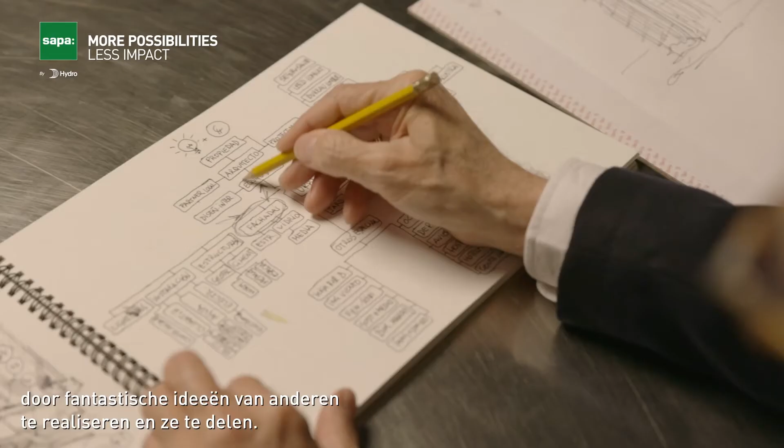First of all, I would like to introduce myself with a simple sentence. Yes, I'm an architect, but an architect with a special profile, because my team and I have developed more than 180 buildings over the last 30 years, making credible the ideas from others, sharing them by teaching in different universities, and especially drawing.

We have a small and very dynamic office based in Barcelona, from where we offer facade consultancy for the best architects around the world, including Pritzker Prize winners.

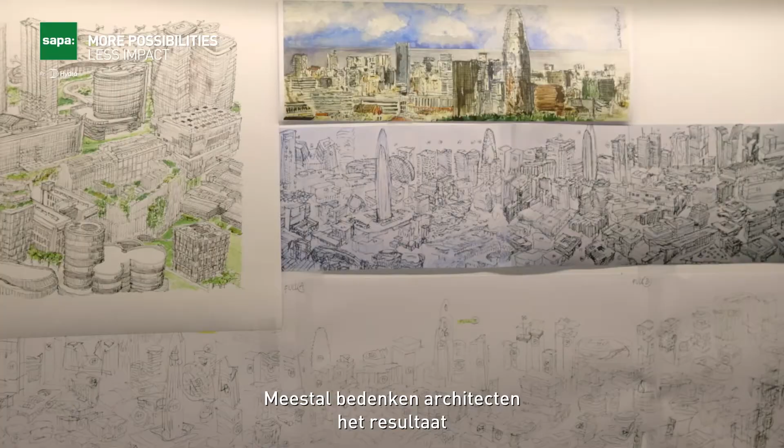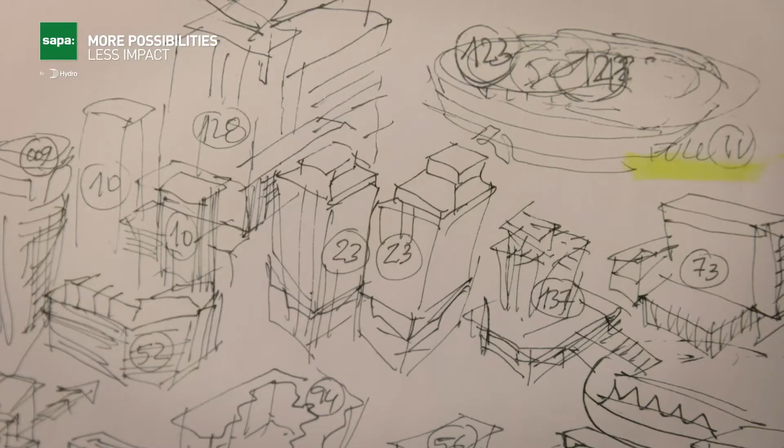Usually architects imagine the result and engineers create the process, or explaining it another way, architects think what and engineers know how. So we, as facade consultants, move in an equidistant position between both, and our projects are developed with a simple philosophy: technique and form are the same.

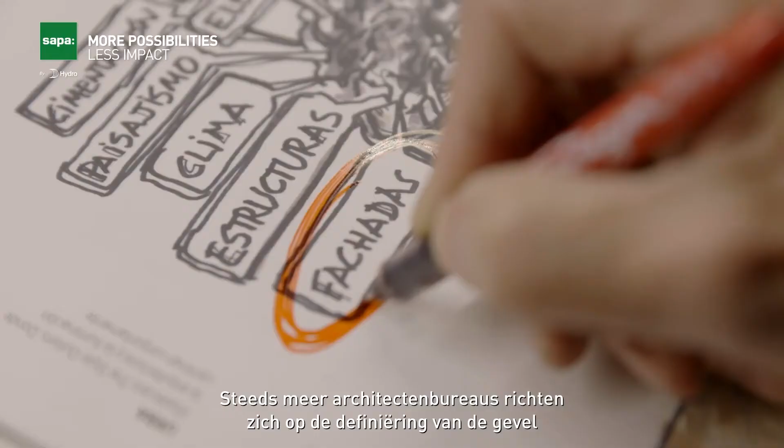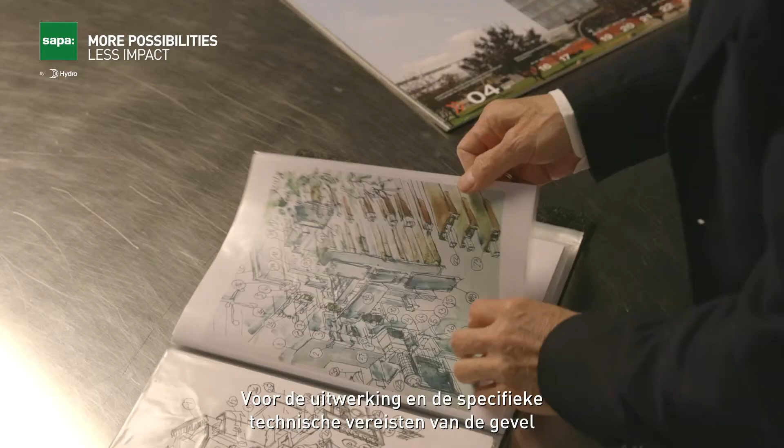Every day, more and more architecture studios focus their work on the level of definition of the facade, the aesthetic aspect, and the conceptual and functional development, leaving the detailing and the specific topics and elements of the facade to be delegated to the technical specialists from the industry.

So the most common way to face the problem of technology is to claim the support of brands that help us develop the most ambitious projects. Our role as consultant, in addition to the above, is to think and advise from the strategic development.

The present leads us to consider energy as one of the engines of evolution, and this has been the case for decades. However, this contrasts with the need to work with large formats and glazed surfaces that put the so-called window-wall ratio in increase, which affects the energy performance of the facade, in contradiction with the dimension of the transparent areas of the buildings.

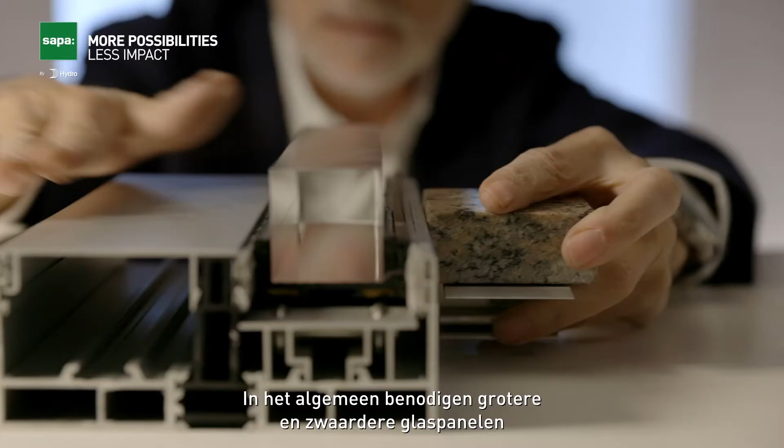On the other hand, this need to increase sizes requires larger profile dimensions, engineered for bigger and heavier glass panels, by means of innovative connection and reinforced glazing support.

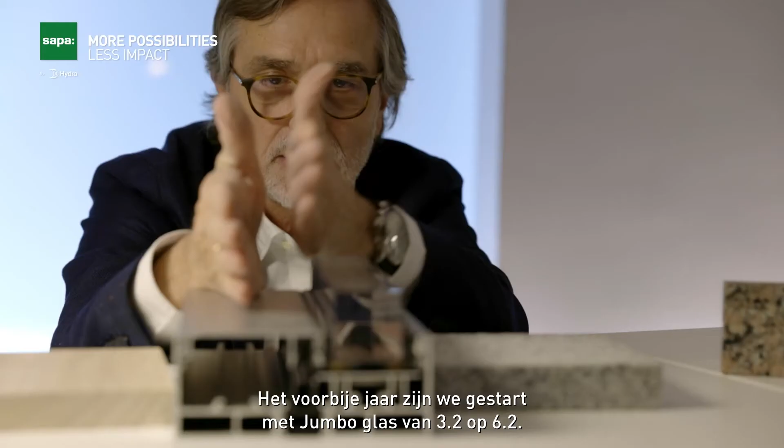Last year we started with jumbo glass, which was 3.2 by 6.2. Actually, with different suppliers, we have glasses from 18 meters in height by 3.4. So obviously we can use these sizes of glass.

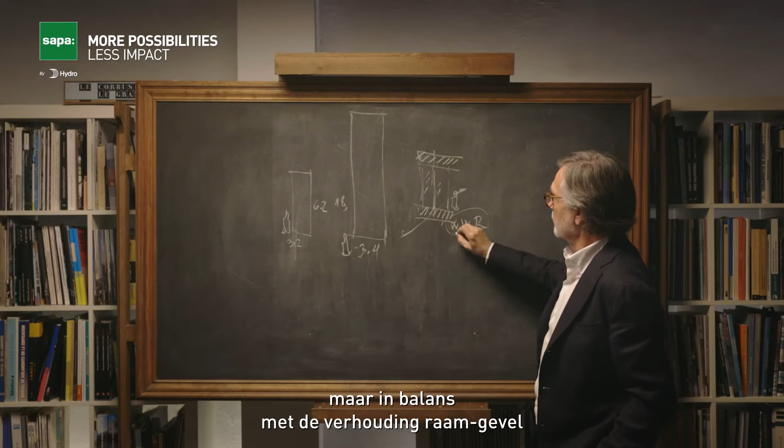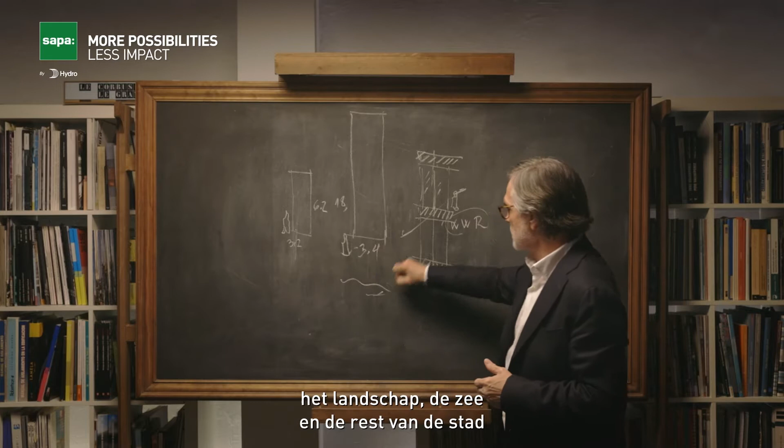The trend of the buildings around the world is to increase the glass surface, but balancing with the window-wall ratio, because we need to balance the comfort of the users contacting directly across the glass with the landscape, the sea, the rest of the city, in order to respect the rules and regulations in terms of energy savings.

The only way that I can explain my experience, my thought, my feeling about the technical decisions, the technical elements, is drawing. My brain is connected with my hand directly.

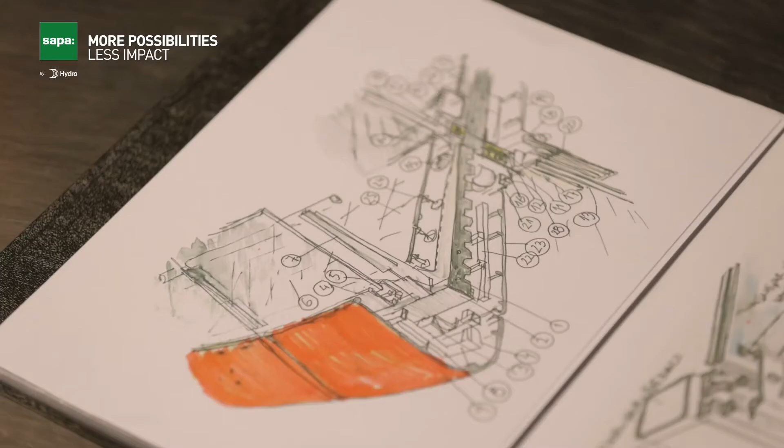When we are creating, we have to pass from the concept and schematic design development to construction documents, trying to be proactive with the architects, usually our clients, in order to achieve the maximal fidelity to the original idea.

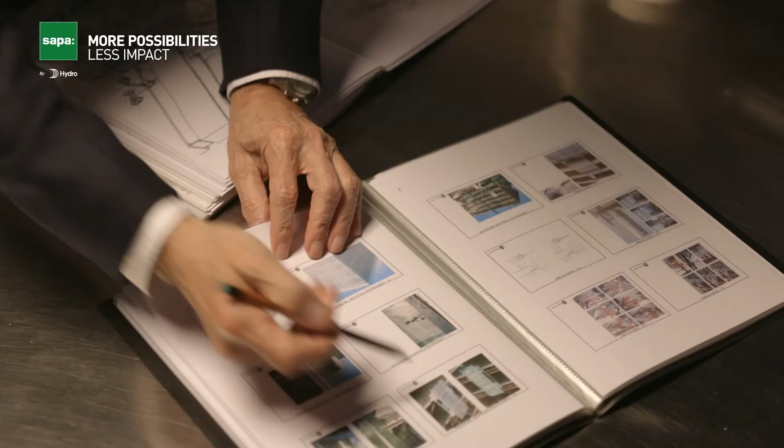For example, a building under construction in Barcelona, named Diagonal Zero Zero, a multi-story building, I think it's 27 levels, with a special balcony. This is the original slab, because it's a huge modification of the building.

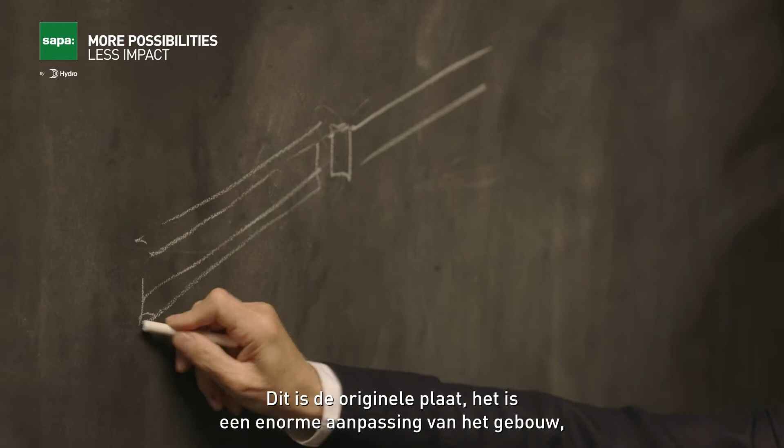This is the slab. This is the beam that we have to support. The level of the interior floor. This is the exterior floor, and we have a shape like this.

This is a balcony, this is a terrace. The building is something like this. It's more or less 110 meters, and all these balconies are here.

In the lateral facade we have a typical curtain wall, a profile with spandrel, glass, and windows. The pass from here to here is very important to understand what happened: what is the slab, what is the structure, what is the weather line.

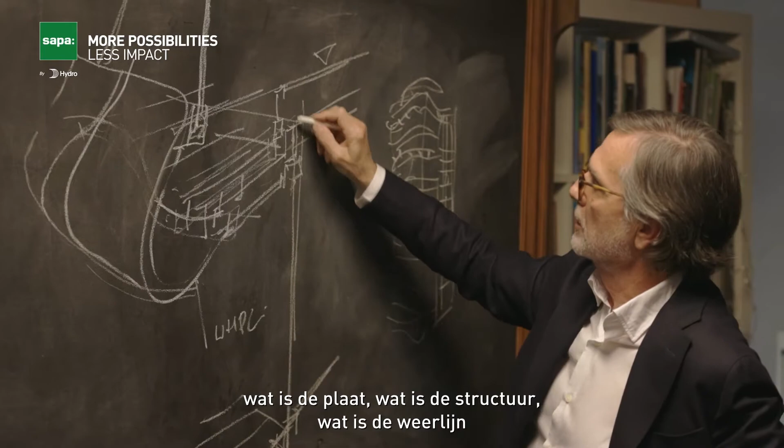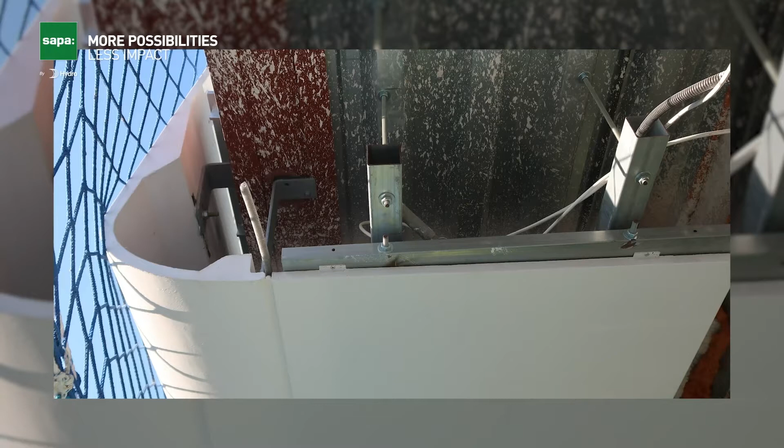In this case, with a sliding corridor, a sliding window, a huge, maybe 250 meter height. We'd like to show this in color, but I think it's clear in order to understand what happened when we develop from the concept to the detail.

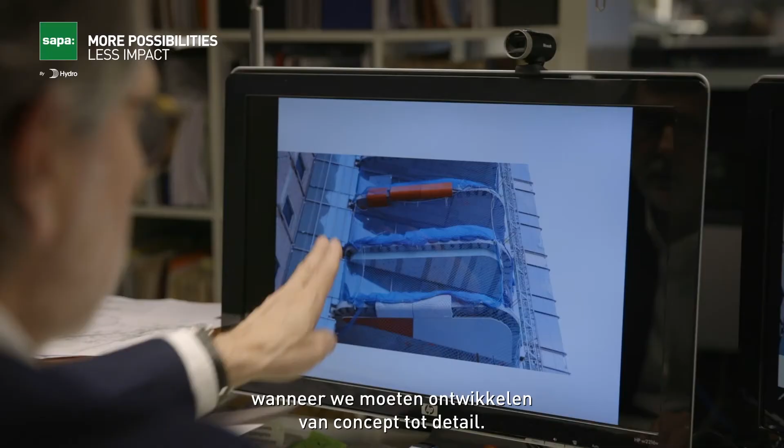The second case I'd like to share is a commercial and residential building in Ibiza, named Isla Blanca. The author is l'agence Moatti-Rivière de Paris. The project is led by Alain Moatti, and the local partner is Josep Ferrer-Llaneras.

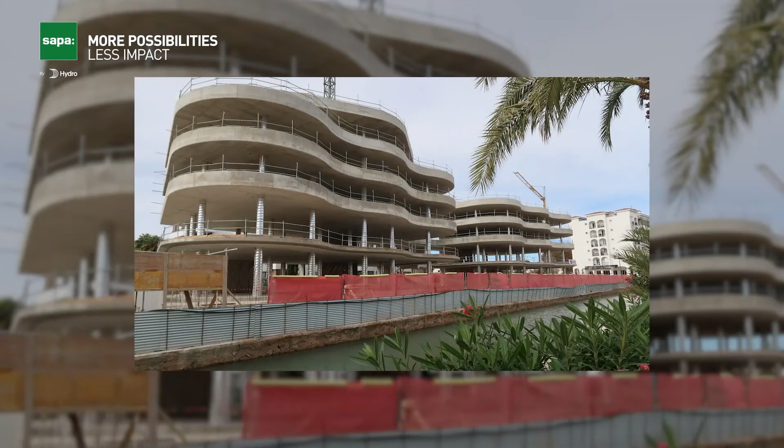The main concept is a shadow device named voilette in French, an element qui vole. The building is double, maybe 80 meters in length, using this kind of material like a hat that produces shadow, like under the face of a woman on the beach.

There are different molds, because this is the main structure of the building, and here is hung a huge element that supports these curves.

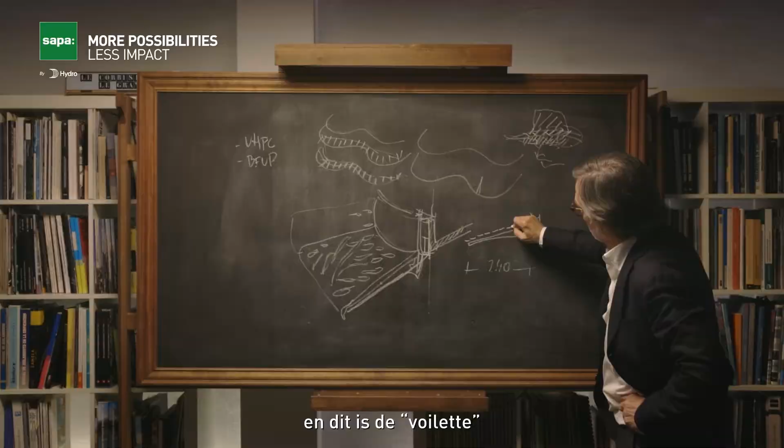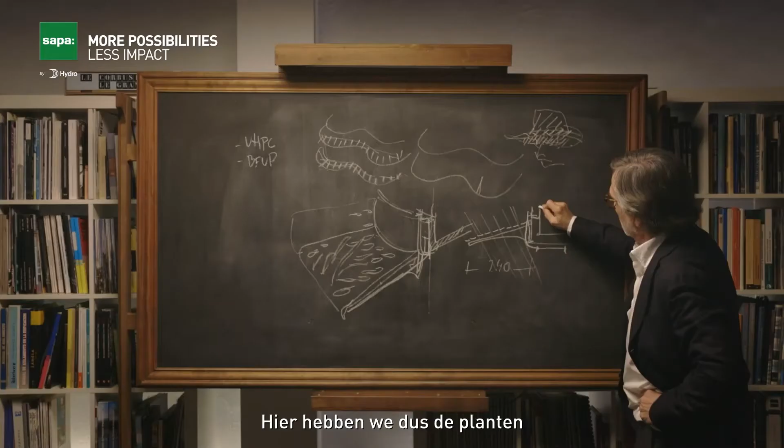So we have the structural element, this is a cantilever, more than 2.40, and this is the voilette in ultra high performance concrete that allows it to work perfectly as a shadow device. So we have the vegetal elements here, and we have the windows, openables, etc.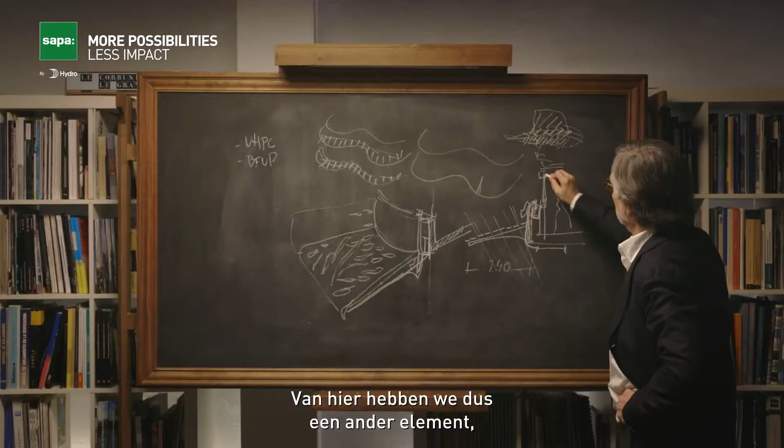From here we have as well another element here that is characteristic of this building.

The third case study is a multi-story hotel in L'Hospitalet, near Barcelona, in the Plaza Europa zone. It's a huge complex with a lot of buildings, hotels, office buildings, etc. This case is a project of Alonso y Balaguer.

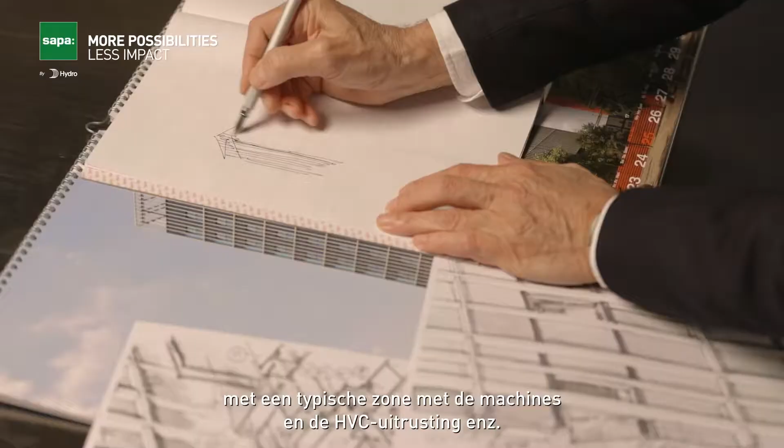It's the most common and typical curtain wall facade. The building is a parallelogram, with a typical zone with machines and HVAC equipment, etc. The rest of the facade is a grid, absolutely regular.

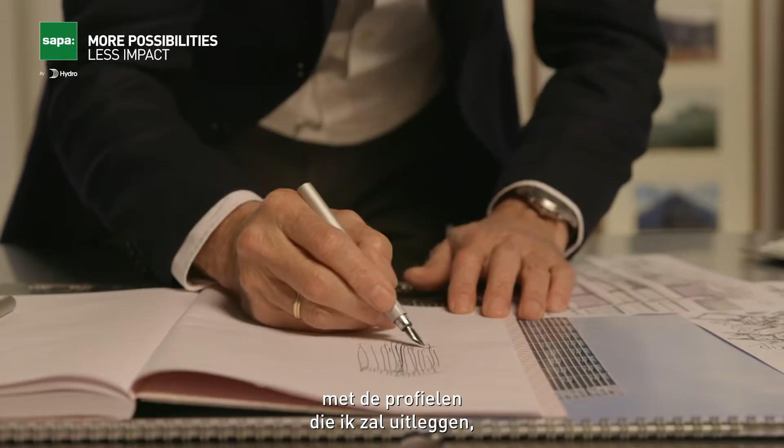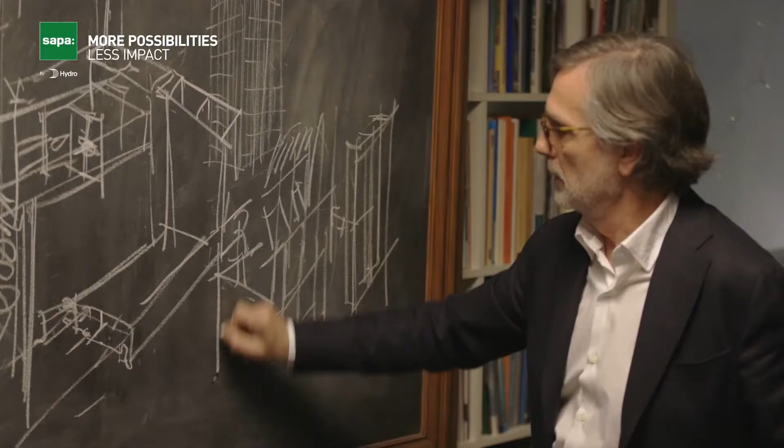With the profiles that I will explain, because in terms of technology it's very simple, but the effect is really very interesting. So we have these two profiles, clipped, and the main mullion of the facade, and that's it.

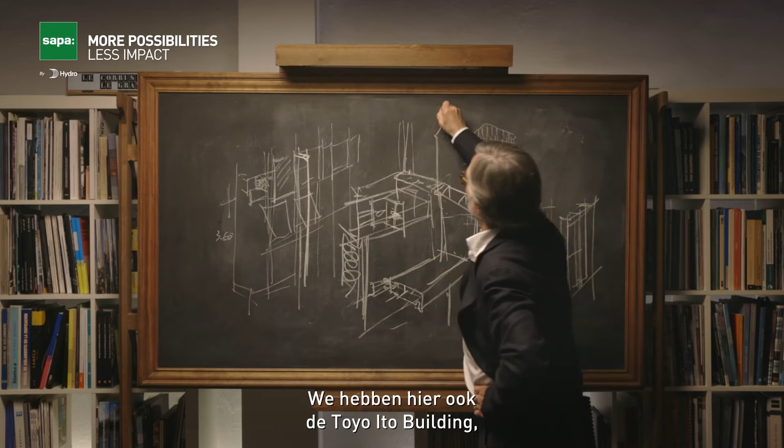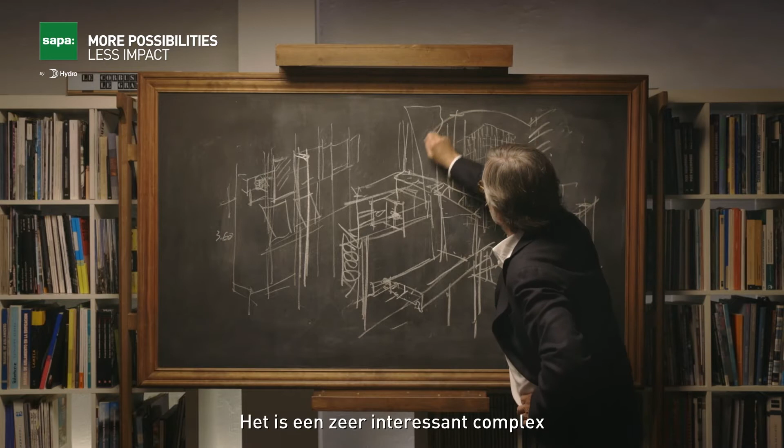So we have here the Toyo Ito building, the Nouvel building, RCR here as well, Moneo. It's a very interesting complex that I invite you to visit, because if you are a passionate architect, I think it could be a good option to spend one day to know directly all this kind of different architecture.

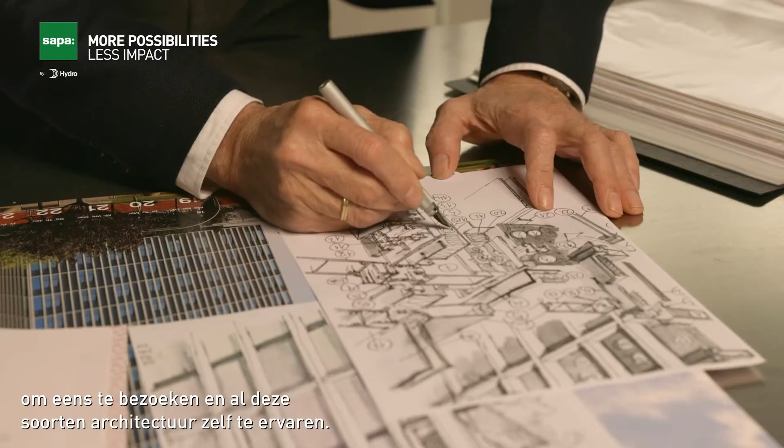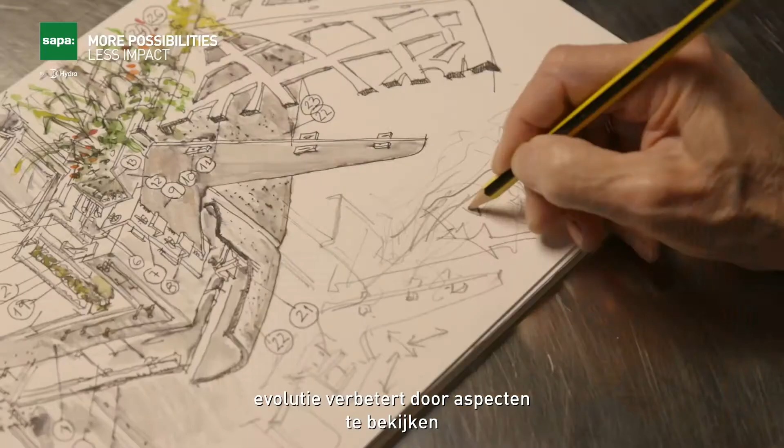As conclusion, I would like to share with you 5 thoughts as a summary. First of all, evolution that improves considering aspects from different points of view, like industry, architects, investors, owners, and consultants like us.

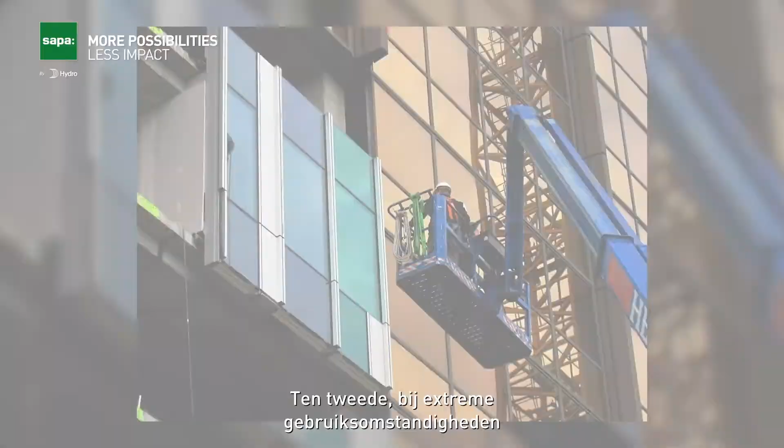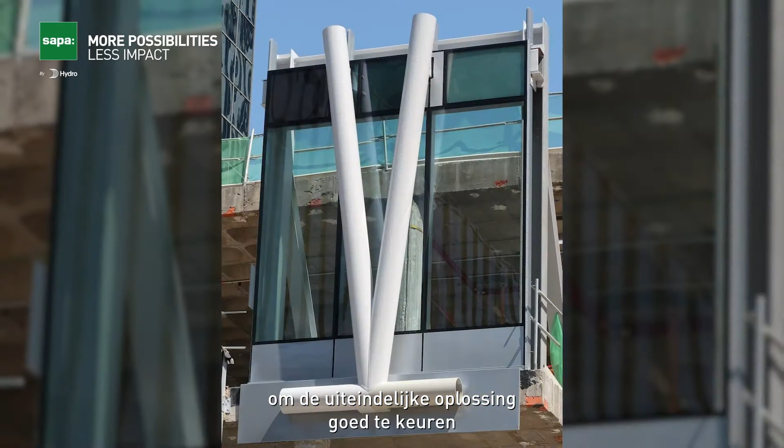Second, the extreme conditions of use are solved by anticipating the problems and building samples, performance and visual mock-ups that are tested by the owners in order to approve the final solution, checking the transparency, the vibration, all the aspects that we have to control by using prototypes and mock-ups in real size.

Third, we have to look for collaboration with international brands that belong to a big and well-known group. It's the best option to guarantee a long experience of success.

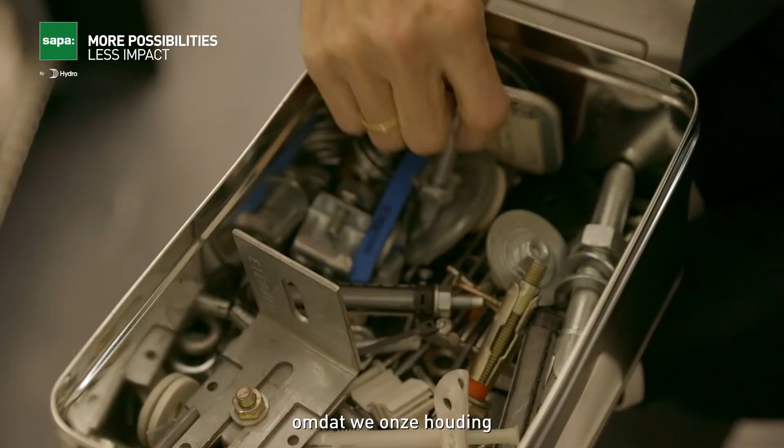The fourth topic, important to sum up this explanation, is to involve the clients and users in the project: planning, commissioning, exploitation, maintenance, and recycling the building as a way of working, because we have to change our attitude about the design and use of buildings.

And finally, we have to work from a global perspective, making it essential to combine the most diverse languages, cultures, rules and regulations, economic and social criteria with the most attractive architectural proposals. For us, it's a privilege to be able to create a space for a better future.

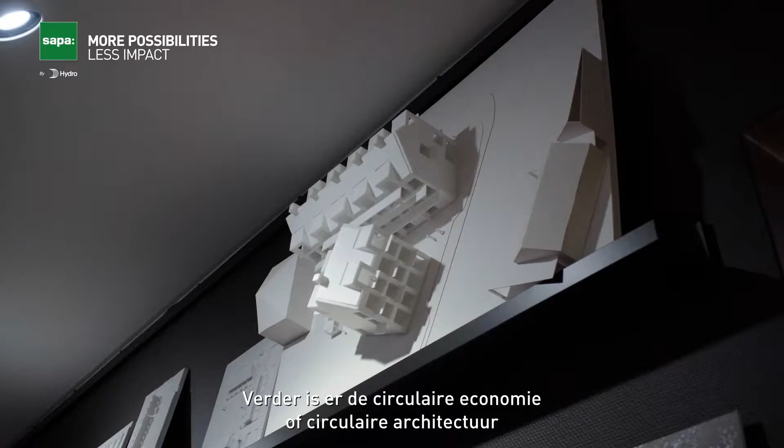The next one is circular economy or circular architecture. And then we work focused with biodiversity. On the social sustainability side, we work with safe environments, health and well-being, and then placemaking.

So if we start with climate smart architecture, or carbon emission as focus, we work very much on designing buildings with a low carbon emission or carbon footprint. That is both from operations when it comes to energy efficiency, but also when it comes to embodied carbon.

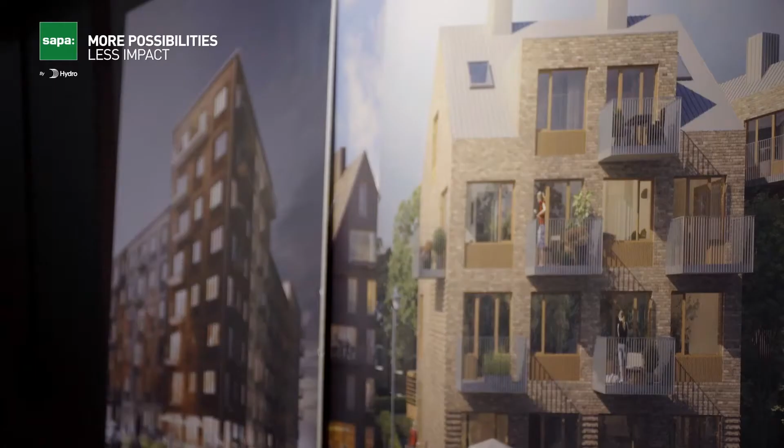If we then talk about circular economy and circular architecture, it's very much about designing resource efficient, securing that we don't use resources unnecessarily, but also about taking care of the buildings that are already built. So transforming or renovating buildings before we start looking for producing new buildings. It's also about reuse and recycle of materials, and also designing for circularity, preparing our buildings for a future that is more circular than it is today.

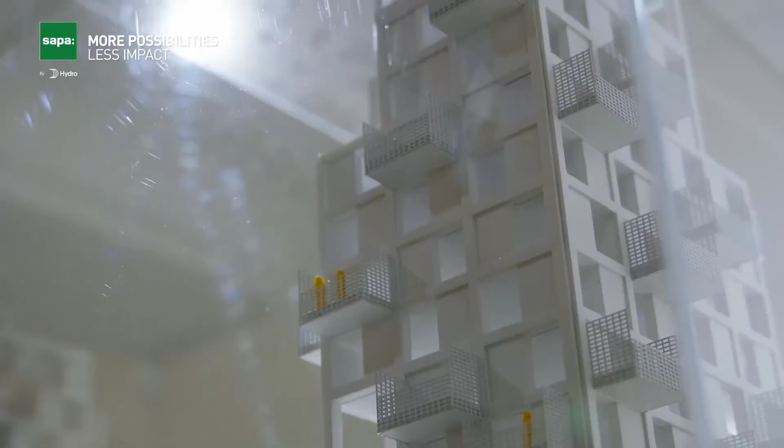And then we can talk a little bit about biodiversity. We know that the built environment, producing materials and constructing buildings have a great negative impact on biodiversity. So when working with the built environment, it's really important to look at biodiversity and see how we can choose materials that have a low impact on biodiversity, and also work with biodiversity when we create the built environments within the cities.

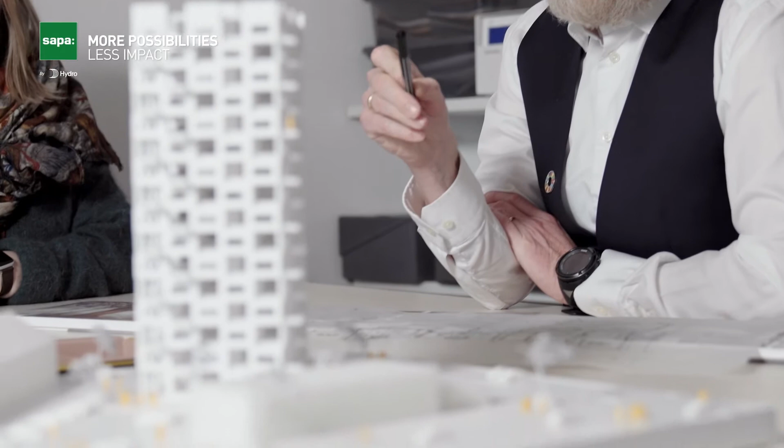If we then talk a little bit about the social sustainability that we work with, one of the areas is safe environments. We know that creating safety within, for example, residential areas, schools, housing, etc., creates people that feel safe and can take in, for example in schools, their education better. They come to school - not being safe at school can make students not come to school. So safety is a very important part of our contribution to social sustainability.

And then we can talk a little about health and well-being. That is an important part if you work with offices, hospitals, schools, also residential areas. If you can support a living that is healthy and supports well-being, then you can solve or contribute positively to some societal challenges. We know stress is an area, at least in the Western world, that is problematic, and we know about different heart diseases and so on.

And then the last one is about placemaking, and that is both about safe environment, but also about interesting environments, places where you want to stay, places where diverse people can come and meet, and you can feel the inclusiveness because you want to stay there, you want to meet other people.

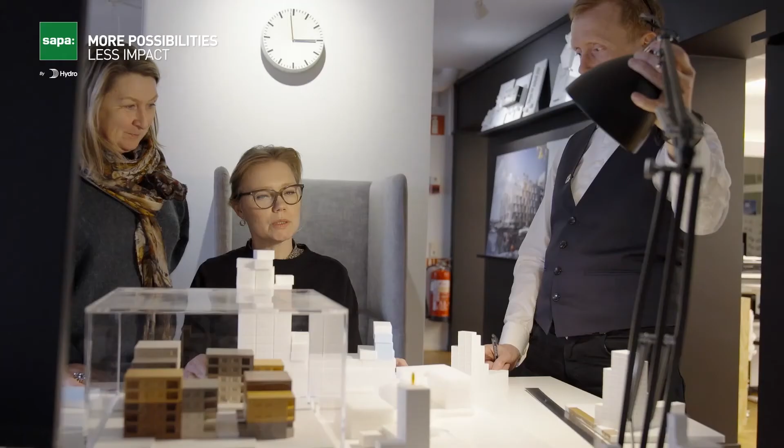And then we also play a very important role when it comes to the actual design. Through the design we can work with, for example, indoor environment when it comes to designing so that daylight comes into the building, that you have a good view of the scenery, and also designing so that we minimize the negative impact of the built environment in relation to resource usage or carbon emission and stuff like that.

And then when we come to looking at choices that we make, for example in relation to materials, we have a great possibility to influence the final positive impact in relation to sustainability by choosing materials that we know can lower, for example, the carbon emission or carbon footprint of the building, or adding to some qualities in relation to indoor environment.

Well, if we talk about materials, we know that the construction industry and producing materials have a great negative impact on the environment. It's everything from polluting the air and the water. It's about using virgin resources that are rare, scarce or limited, so we have to make sure we don't use them too much, because then we'll run out of them. We know, for example, that 80% of all drinking water goes into producing different materials, and 80% of the loss of biodiversity is coming from producing materials, foods, etc.

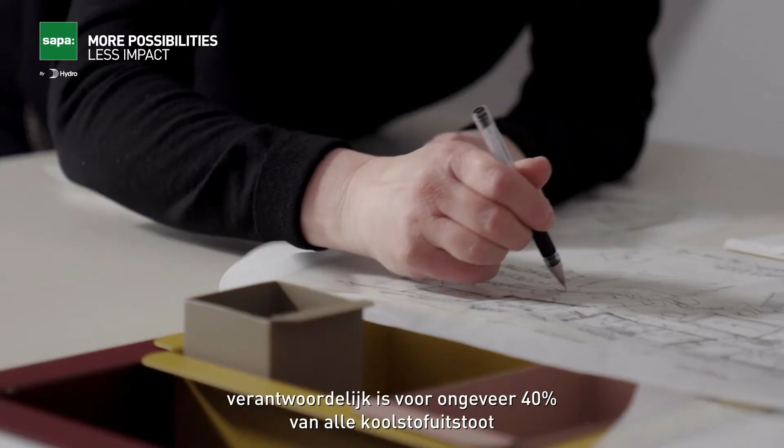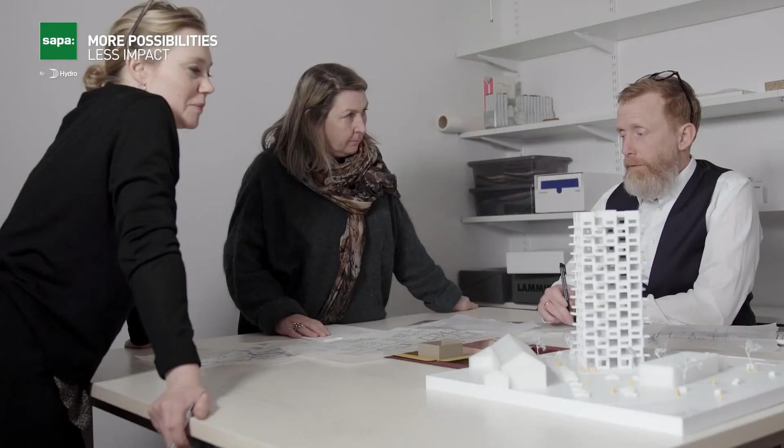We know that the construction industry is emitting some 40% of all carbon emissions. And we also know that the built environment has a big impact on water and biodiversity. All this together makes it really important to work holistically in relation to sustainable development.

Talking about carbon emission, it's really important that we not only look at the operation, because if we look at carbon emissions, we have one third that comes from embodied carbon and two thirds that comes from operation. But we also know that carbon emission from embodied carbon is carbon that is emitted day one, and we're quite in a hurry to turn the trend in relation to carbon emissions. So therefore, we have to have some 40% lower carbon emission in relation to embodied carbon by 2030 to be able to reach the 1.5 degree target defined by the Paris Agreement.

So a building that is not addressing embodied carbon, I would say, is not a sustainable building at the moment. Then it comes very natural that the one that has the lowest carbon emission is the best one to choose from a sustainability perspective. So you can compare one with another and go for the one that has the lowest carbon footprint.

You should always start with taking care of the negative footprint of your own production, because that one you can be 100% sure makes a difference. When choosing to compensate, you will never know if that forest that you have planted as compensation will be there in 20 or 30 or 40 years.